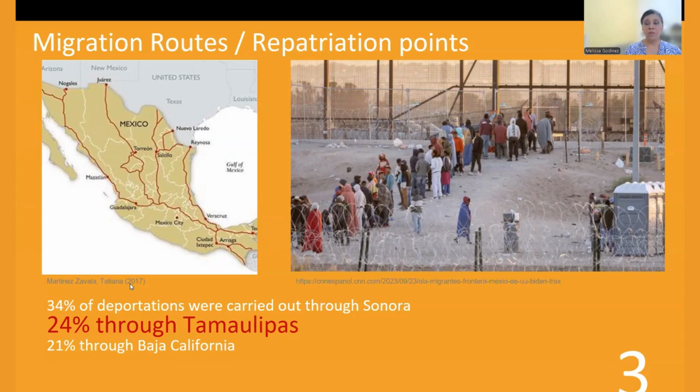The map on the left shows the main migration routes from Mexico to the United States. We also note that the three main points for repatriation are Sonora, Tamaulipas, and Baja California. For this reason, the project is being proposed in the Tamaulipas border area.

In January 2025, President Donald Trump signed executive orders that included declaring a national emergency to deploy military personnel to the Mexican border and reactivating the Remain in Mexico program.

The architectural proposal integrates strategies of empathic architecture and spaces to promote social interaction. The results of the study and the main contribution was a draft of the digital prototype with 6 functional coherence points, and will be developed in a second phase with materials that allow durability and flexibility.

The presentation aims to show the creative process of the morphological solution inspired by the pyramidal forms of pre-Hispanic temples. So, how do we respond to emergencies, particularly in the context of the ongoing migration crisis?

According to CENAPRED, the states most affected by natural disasters, or in this case, the migration crisis, are also the ones marked by underdevelopment, social injustice, and economic irrationality. These vulnerabilities are compounded during emergencies, where not only physical damage occurs, but also deeper sociocultural and environmental transformations.

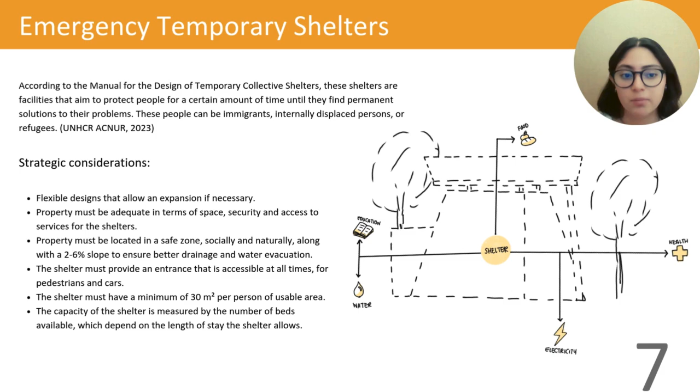Recognizing the need for well planned emergency infrastructure, we based our project on the recommendations from the Manual for Design of Temporary Collective Shelters. These shelters are meant to provide short term protection until people can find permanent solutions. The manual outlines several key requirements, such as flexibility for expansion, secure and accessible locations, good drainage, and a minimum of 30 square meters per person, with the shelter's capacity determined by the available beds.

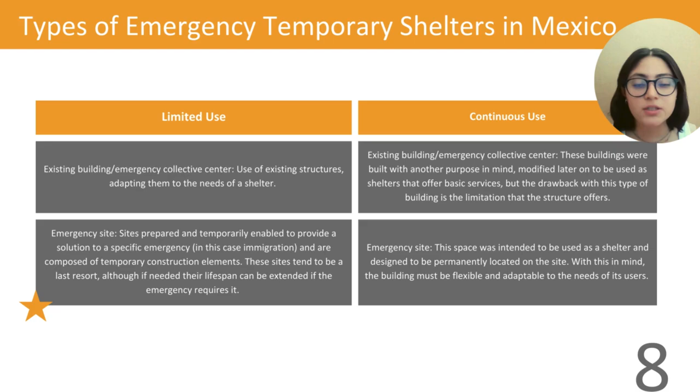Among the 4 typologies that the manual offers, we chose to base our proposal on the limited use emergency site typology. These types of shelters are temporary in nature and often set up quickly to address specific emergencies like migration. They are built using provisional materials and can remain in use longer if needed.

For our project, we decided to do some case studies. This is La Matiz, an emergency shelter designed in 2015 by students from the Pontifical Catholic University of Peru. Created for Peru's coastal region, it's designed to face earthquakes and extreme weather from El Nino. Though compact, just 4.4 square meters, it can hold up to 8 people thanks to its semi-spherical form.

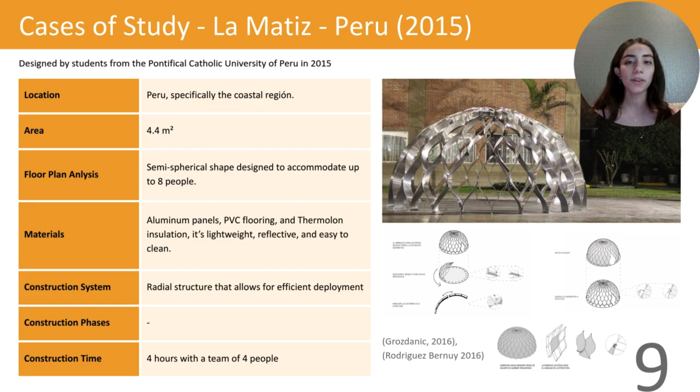It uses lightweight aluminum, durable PVC flooring, and waterproof Thermolon insulation. The radial structure allows 4 people to assemble it in just 4 hours.

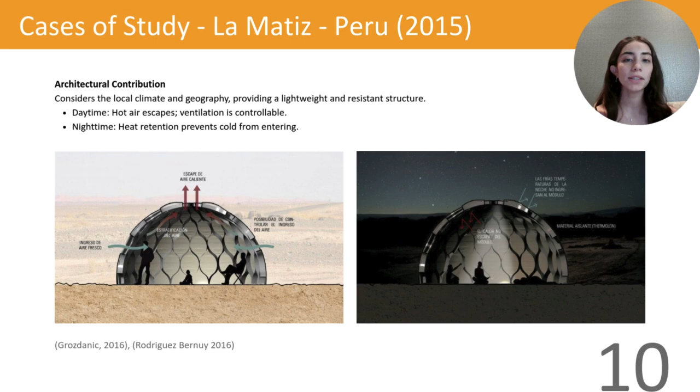This design considers local climate and geography by providing a lightweight, resilient structure that adapts to temperature changes, allowing hot air to escape during the day while retaining warmth and blocking cold air at night. This is the emergency shelter designed by architect Shigeru Ban in 1995 in response to the Kobe earthquake.

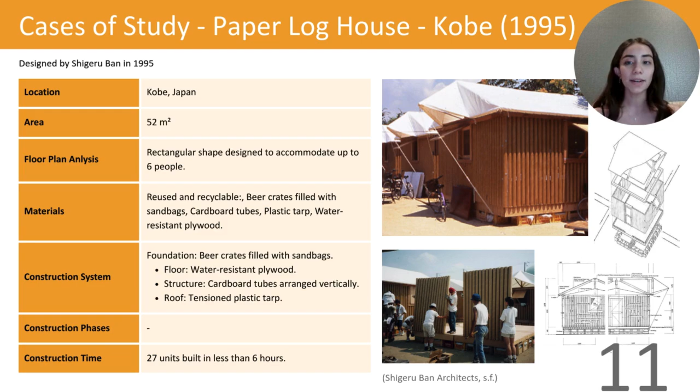At just 52 square meters, it can house up to 6 people with its simple rectangular layout. Built from reusable materials, beer crates with sandbags for the foundation, cardboard tubes for the structure, plywood flooring, and a plastic tarp roof, this shelter was fast to assemble, 27 units in under 6 hours. A smart, low-cost design for urgent disaster relief.

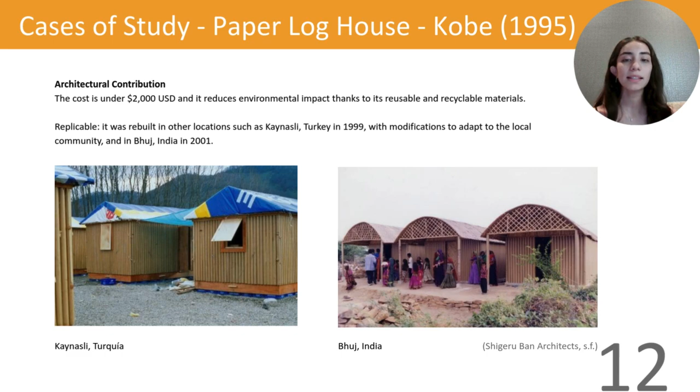The shelter cost under 2,000 US dollars, uses reusable and recyclable materials to reduce environmental impact, and has been successfully adapted and replicated in places like Kaynasli, Turkey, and Bhuj, India.

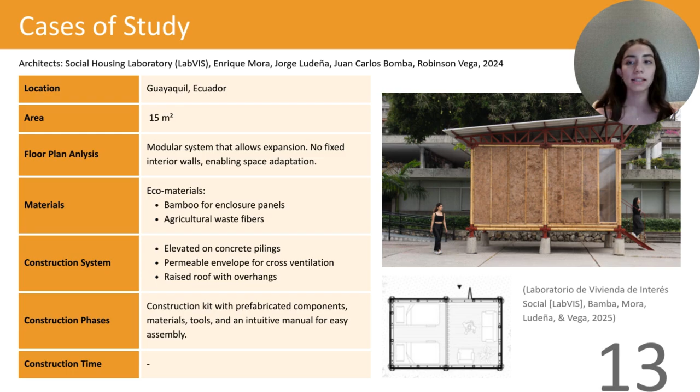This is the emergency shelter designed by LabVis in 2024 as a response to post-disaster housing needs in Guayaquil, Ecuador. It covers 15 square meters and uses a modular system with no fixed walls, allowing flexible use. Sustainable materials like bamboo panels and agricultural waste fibers reduce environmental impact. The shelter is elevated on concrete pilings with cross ventilation and a protective roof overhang. It can quickly be built using a prefabricated construction kit with an easy-to-follow manual.

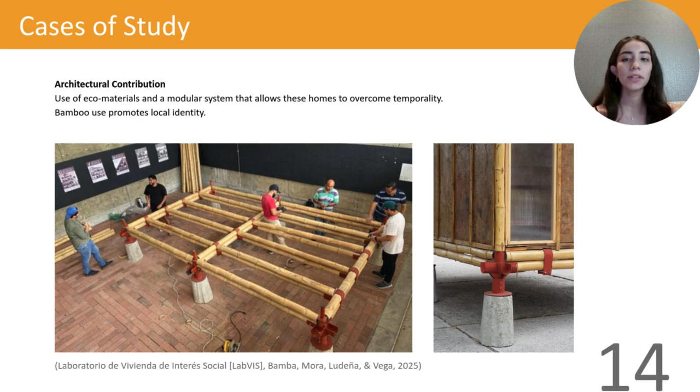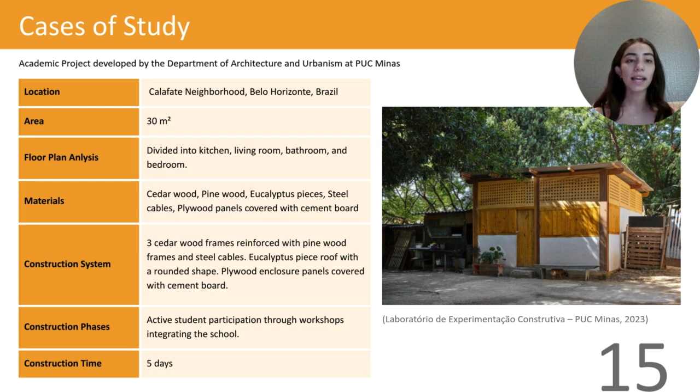Covering 30 square meters, it includes a kitchen, living room, bathroom, and bedroom, made with local sustainable materials like cedar, pine, eucalyptus, and reinforced plywood panels. The shelter was built using prefabricated parts and assembled in just 5 days, with students actively participating in hands-on workshops. This project integrates academic construction practice with real-world impact by addressing the specific needs of vulnerable communities through a thoughtful hands-on project.

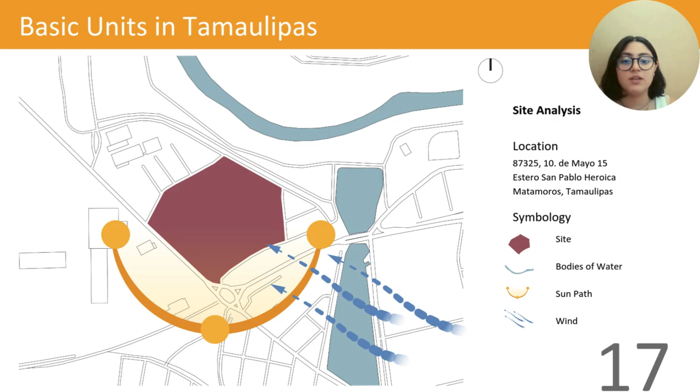For our project, our proposed site is located in Matamoros, Tamaulipas, specifically at 87325 10 de Mayo 15 Estero, San Pablo. The site analysis revealed useful information, such as nearby bodies of water, sun paths, and prevailing southeastern winds. All of this informed the layout and design of our shelter units.

For our project, we designed 5 different typologies to accommodate different needs. Some units include private bathrooms, while others prioritize open space or storage solutions. By offering a variety of options, we aim to give users a sense of autonomy and dignity, which is often lost in crisis situations.

The second typology shares most of the same characteristics of the first, with the main difference being the absence of a private bathroom, which is replaced by a small terrace. The third typology introduces a different layout, featuring solid partition walls that create 2 separate dormitories, each with 2 beds, as well as a private bathroom for the entire unit.

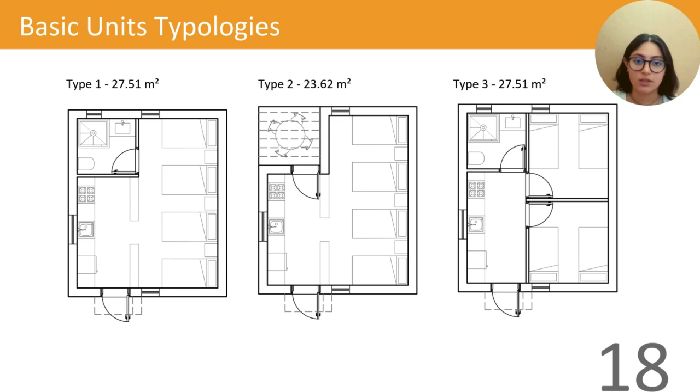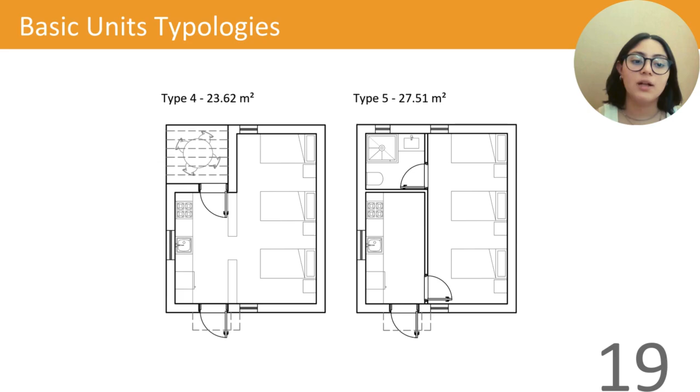And here we have the final 2 typologies. As you can see, they share some resemblance to the other 3 from before, but the difference here is that these 2 typologies offer more spacious accommodations, reducing occupancy to 3 beds per unit. Typology 4, as you can see, includes a terrace and a furniture-based partition, while typology 5 incorporates a private bathroom and a partition wall made from the same material as the rest of the unit.

The materials used for this project will be finalized in the second development phase. For now, we propose using concrete panels as the main structure, strong, durable, and quick to assemble. We are also exploring sustainably sourced local materials. Plywood panels, for example, are being considered for walls and partitions. When sealed correctly, plywood is lightweight, cost effective, and well suited to Tamaulipas' warm and humid climate.

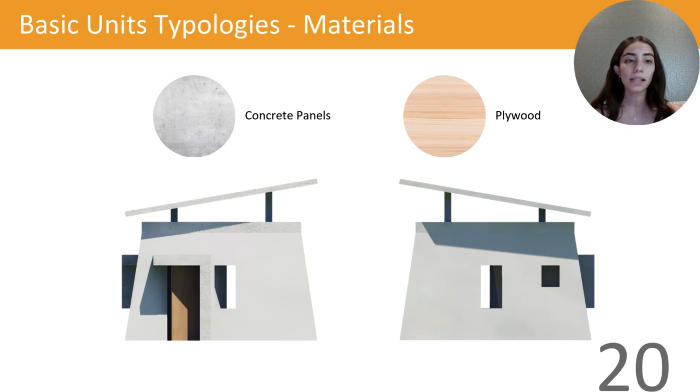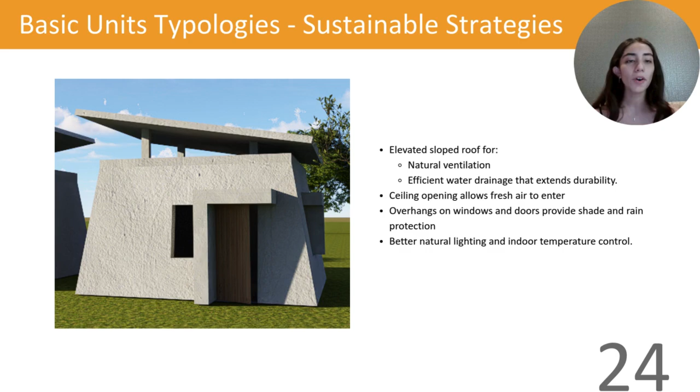Our design includes simple but effective sustainable strategies. The roof is elevated and sloped, allowing hot air to escape and cool air to enter naturally, reducing the need for mechanical ventilation. It also helps drain water efficiently, preventing damage and extending the life of the structure. Windows and doors have overhangs that provide shade from the sun and protect from the rain.

The benefits of our project are that it is eco-friendly, low-cost, climate-adapted, fast-built, durable, made with local materials, and expandable. We would like to further research the typology so we can be more inclusive for people with disabilities or special needs and create more social areas.